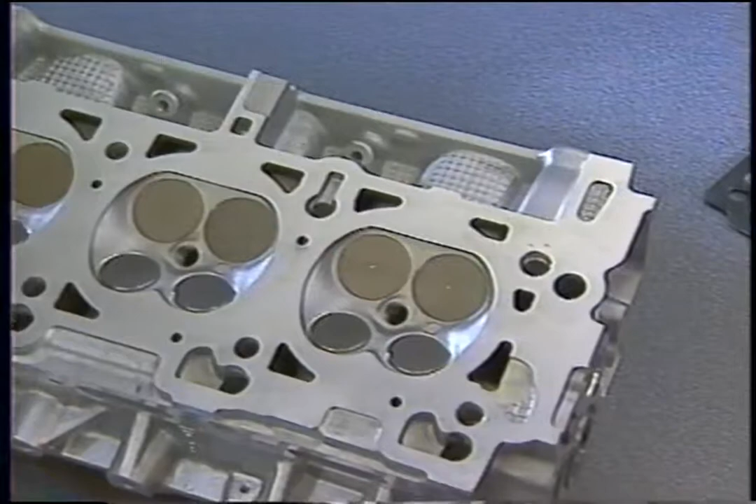Maintaining a good seal between the cylinder head and engine block has always been a critical part of engine service. With the increasing use of aluminum cylinder heads and their special sealing characteristics has come a new type of head gasket: multi-layer steel, or MLS.

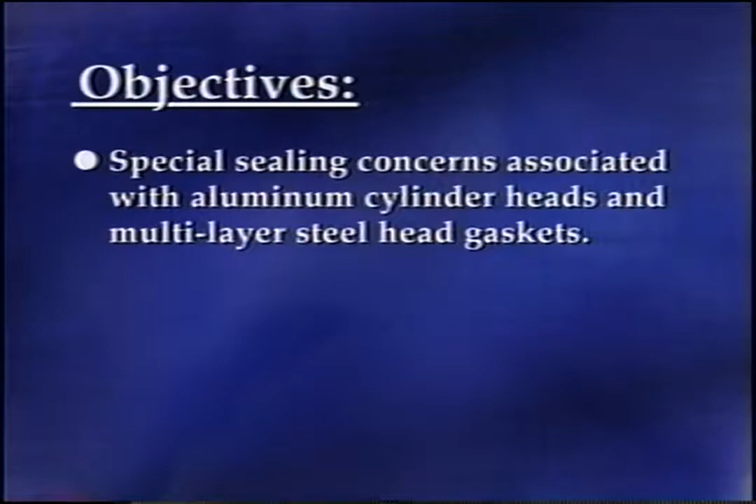aluminum cylinder heads with the new multi-layer steel gaskets. After viewing this program, you should be able to describe special sealing concerns associated with aluminum cylinder heads and multi-layer steel head gaskets, techniques you can use to check for a leak between the cylinder head and engine block, appropriate

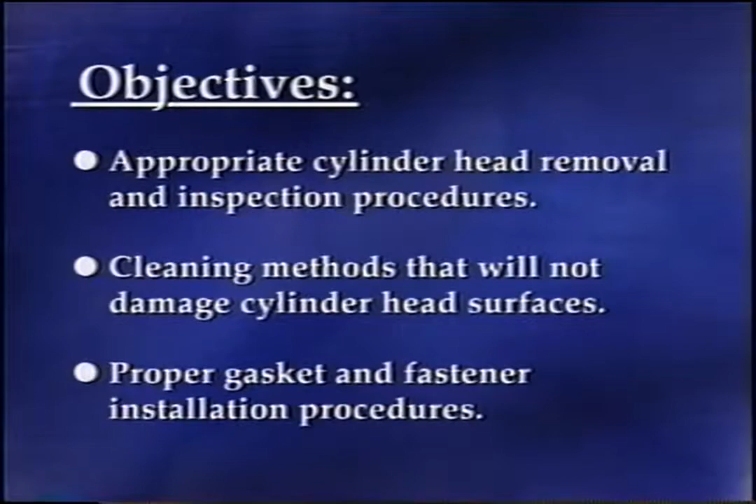cylinder head removal and inspection procedures, cleaning methods that will not damage cylinder head surfaces, proper gasket and fastener installation procedures, and proper follow-up to ensure a good repair.

In this segment, we're going to look at some of the characteristics of aluminum cylinder heads and multi-layer steel gaskets that affect sealing. Let's start with the cylinder heads.

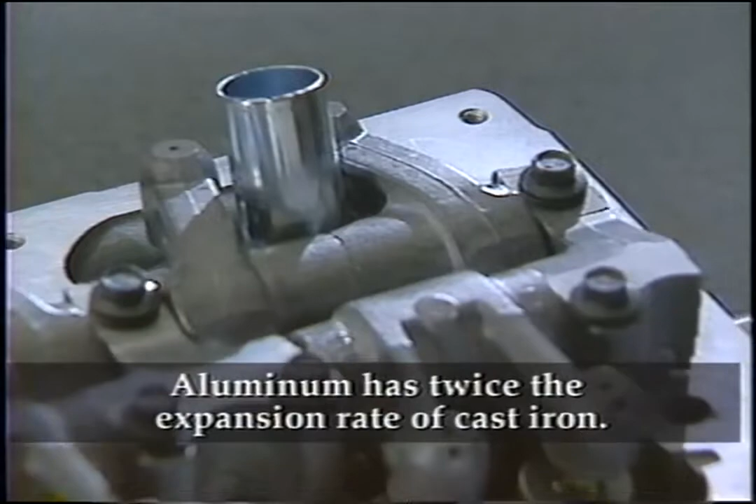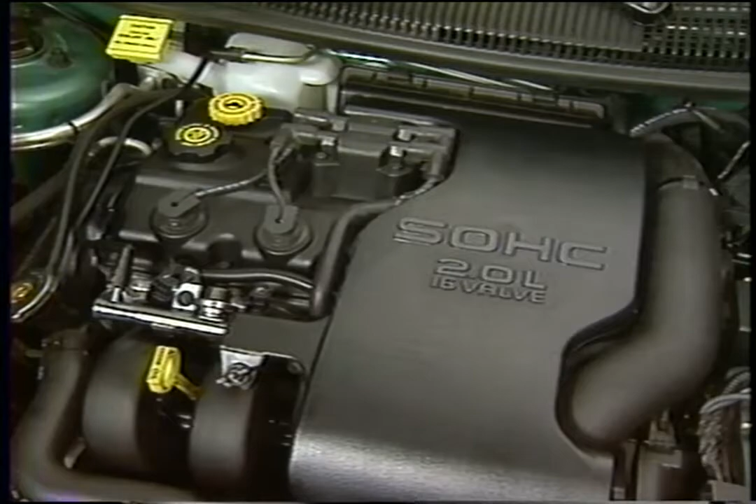First of all, cylinder heads that are made of aluminum have roughly twice the expansion rate of cast iron cylinder heads. The result is greater expansion and contraction as the engine heats and cools, and a corresponding need to maintain

a good seal with fasteners that have been tightened in the proper sequence to the correct torque. Also, aluminum's expansion rate combined with its flexibility means that overheating is more likely to result in warpage and a seal leak than with cast iron cylinder heads.

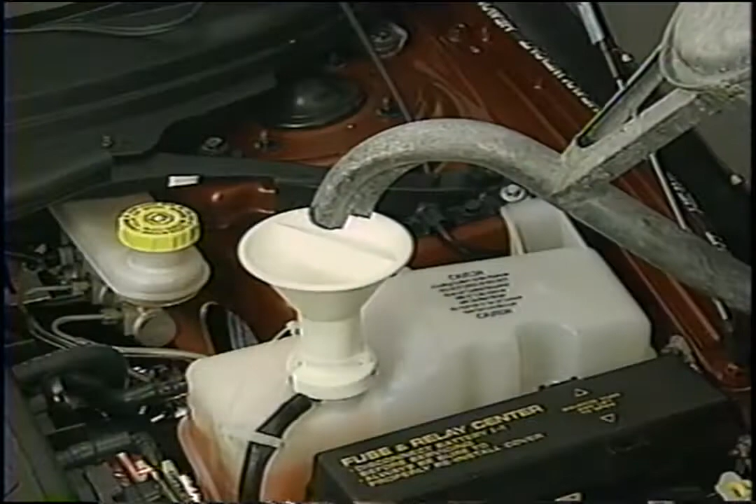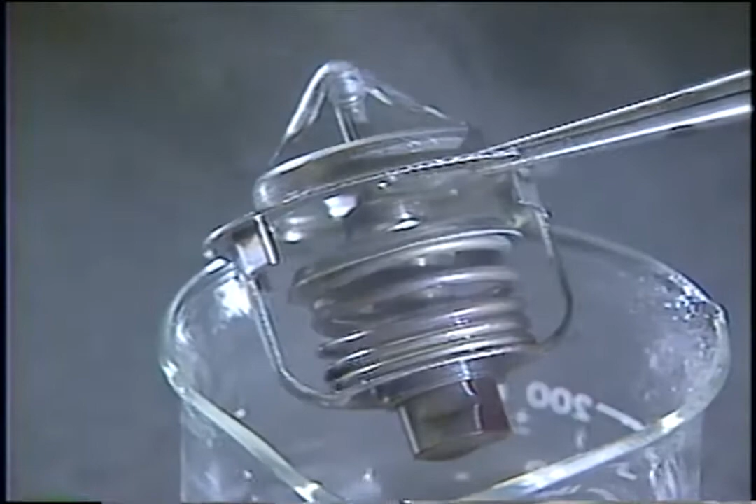As a result, it's particularly important to follow the recommended procedures when servicing the cooling system to track down and correct the causes of engine overheating and to carefully examine the cylinder head on an engine that has overheated.

The fact that aluminum is softer and more flexible than cast iron also means that incorrect removal, cleaning, and installation procedures can damage it, and that you'll need to examine it closely for cracks and corrosion.

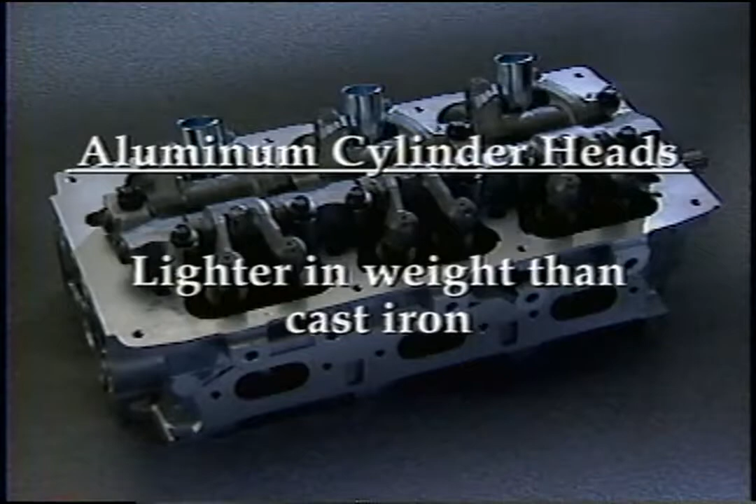Of course, on the plus side, aluminum cylinder heads are much lighter than those made of cast iron, resulting in significant weight savings. In the past, composite and graphite head gaskets have provided effective sealing for aluminum cylinder heads.

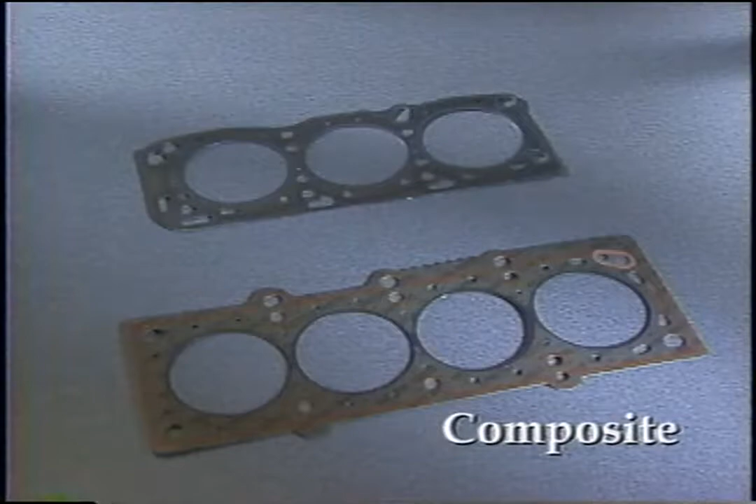Composite gaskets use a fiber facing on a steel core. Graphite gaskets also use a steel core, only with a graphite facing.

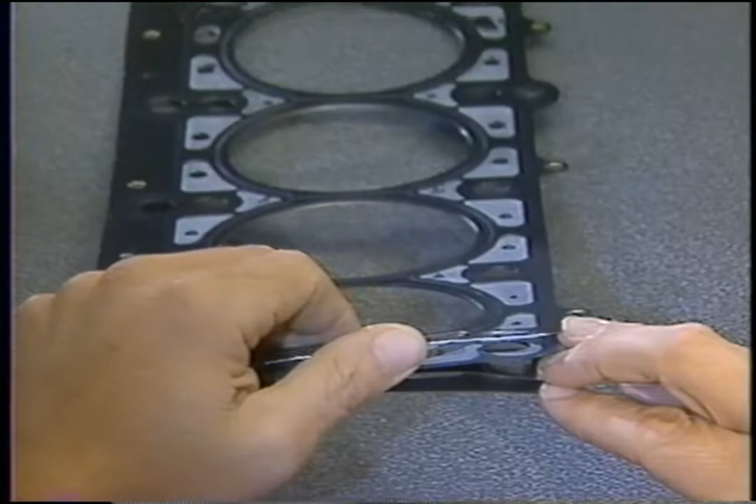Changes in gasket technology have led to the increasing use of multi-layer steel gaskets for a superior seal. As its name implies, the multi-layer steel gasket uses several layers of stainless steel. A thin rubber coating between the layers provides sealing.

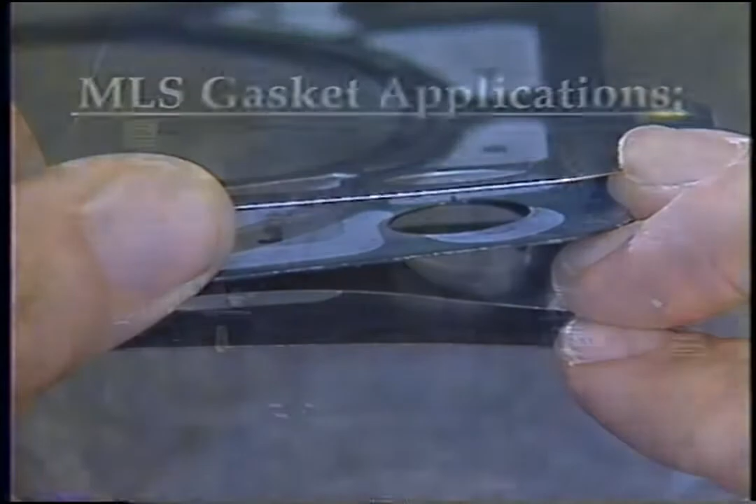Currently, multi-layer steel gaskets are used in all 2-liter and 2.4-liter four-cylinder engines with rear exhaust, and they replace the composite gaskets used for servicing these engines in previous model year vehicles.

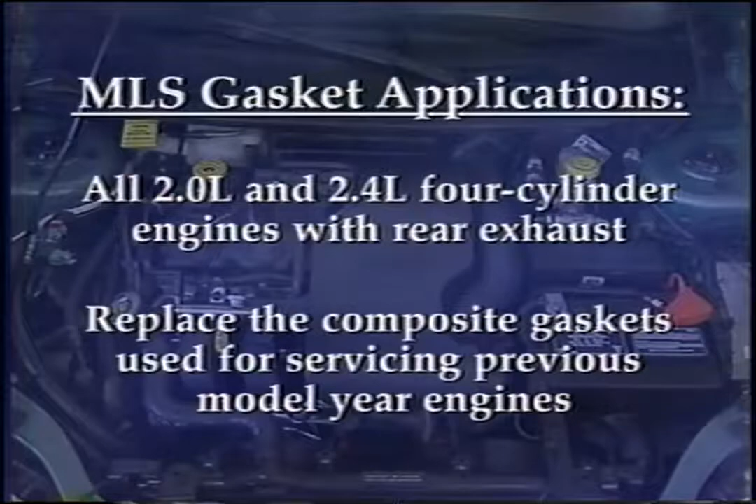You'll also find these gaskets in 2.7-liter, 3.2-liter, and 3.5-liter aluminum block V6 engines, and in the 4.7-liter V8 engine used in Grand Cherokee. The Viper V10 engine also uses this gasket design.

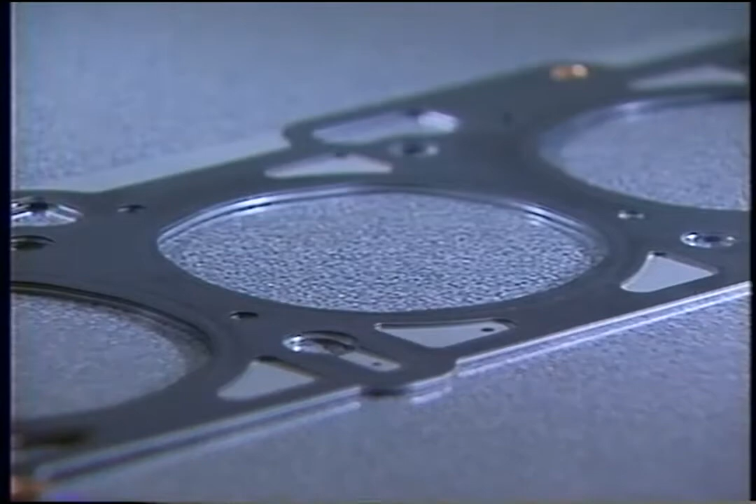The multi-layer design has a number of advantages. For one thing, because of its uniform thickness, the MLS gasket is less likely to cause bore distortion after the cylinder head is installed. The multi-layer steel gasket is also more resilient than other gaskets.

So, after being compressed, it bounces back to form a good seal. Because it provides an almost seamless transition from cylinder head to block, a multi-layer steel gasket also contributes to

lower emissions. While the multi-layer steel gasket is designed to provide a superior seal, it is not a cure-all for cylinder head or block imperfections.

And, as we'll see later, you still have to inspect these components thoroughly to ensure that they can provide a good surface for the MLS gasket to seal against.

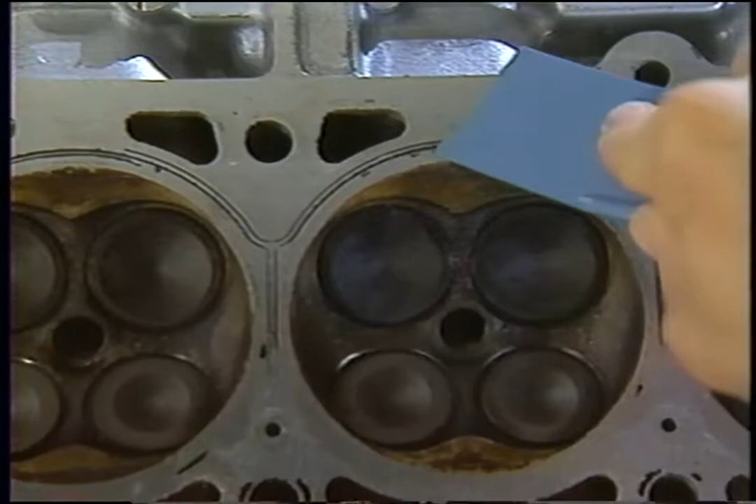When diagnosing symptoms that could be caused by a cylinder head seal leak, it's important to make sure that the cylinder head seal is in fact the cause of the symptom. Both oil and coolant can travel from external leaks in other locations to the cylinder head seal area, so it's critical to check all potential leak sources.

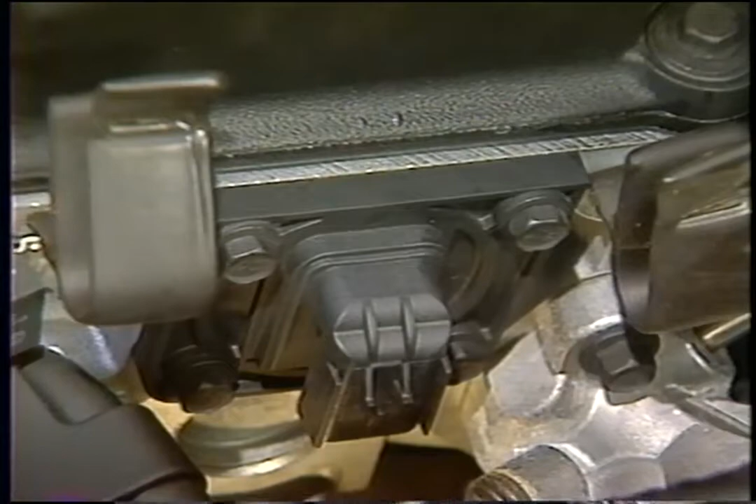In the case of oil leaks, that means checking such items as the cam sensor seal, the cylinder head cover gasket, and the PCV connections. In cases that are difficult to diagnose, you may need to use dye that is sensitive to ultraviolet light to pinpoint the source of the leak.

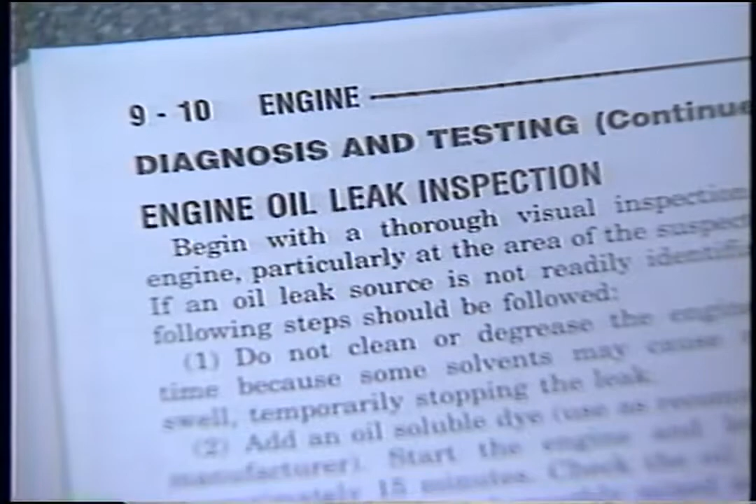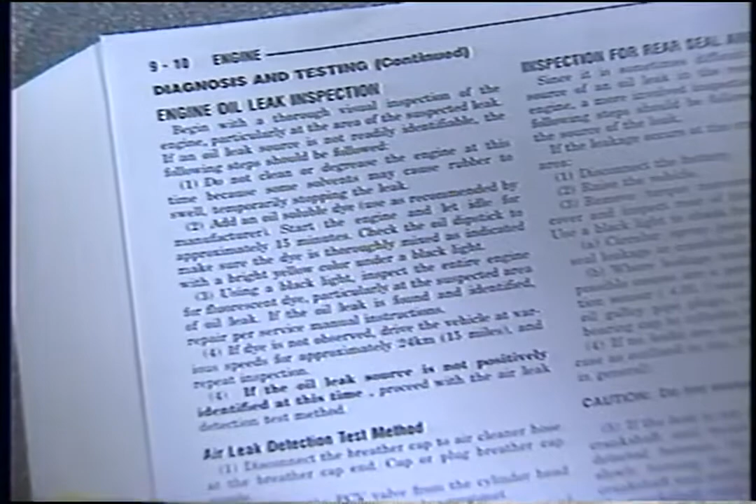Instructions for conducting this and the air leak detection test are located in Group 9 of the service manuals. They will also be covered in an upcoming Mastertech, so be sure to watch for it.

In some cases, such as when a warm engine emits large amounts of steam from the exhaust, it's pretty obvious there is an internal coolant leak, possibly from the cylinder head seal into one or more cylinders. Another obvious sign of an internal leak is spark plugs that are fouled with coolant.

When the leak is not quite so obvious, you may need to pressurize the cooling system to check its integrity. You may also need to check the coolant for oil, or use a chemical test to check for exhaust gases in the coolant. The point is to determine, based on the symptoms and the tests, exactly what, if anything, is leaking and where it is leaking to.

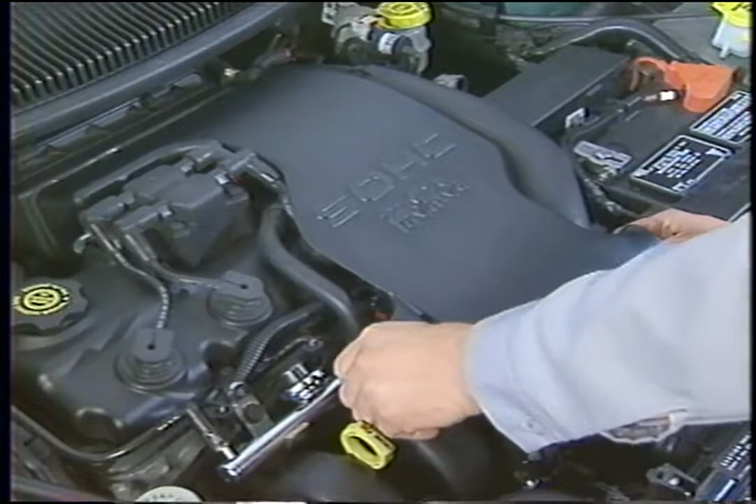Once you've established the approximate location of an internal leak, you still need to disassemble engine components and visually inspect the area to confirm the cause.

Remember, a leak between coolant and oil passages, or between these and the combustion chamber, is not necessarily proof that the cylinder head seal is at fault. In addition to the cylinder head seal, a crack in the cylinder head or in the block are also possibilities.

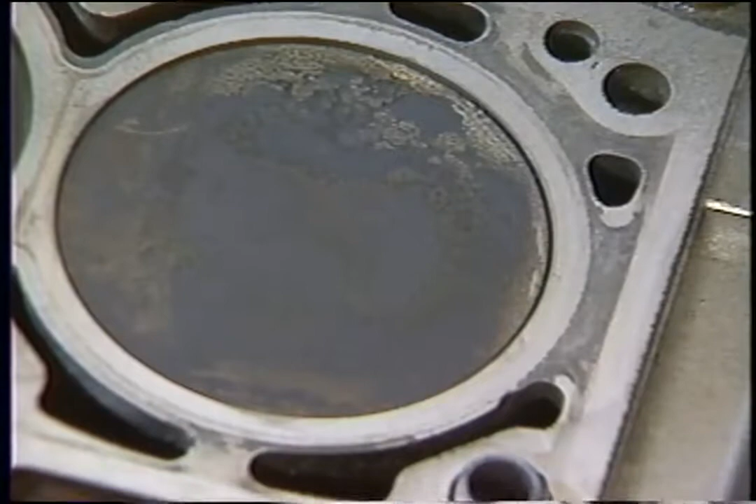Also, keep in mind that if the cylinder head seal did fail, a complete diagnosis involves finding the underlying cause of the failure. By underlying cause, we mean cooling system problems, which lead to overheating and resulting head warpage. Combustion problems, such as pre-ignition or detonation that damage the cylinder head gasket, are another underlying cause of cylinder head seal failure. Unless these problems are corrected, you're likely to see the same vehicle back again with another cylinder head sealing problem. We'll talk more about these later in the program.

It's also important to use appropriate cylinder head removal and cleaning procedures to avoid creating new sealing problems. These procedures are the subjects of the next part of this program.

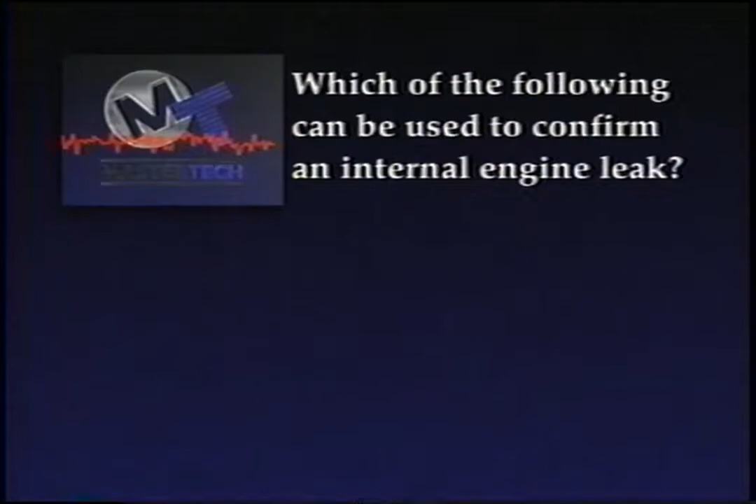Which of the following can be used to confirm an internal engine leak? A, an inspection of the spark plugs. B, a cooling system pressure test. C, a chemical test for exhaust gas in the coolant. Or D, all of the above.

The correct answer is D. All of these methods can be used to confirm an internal engine leak.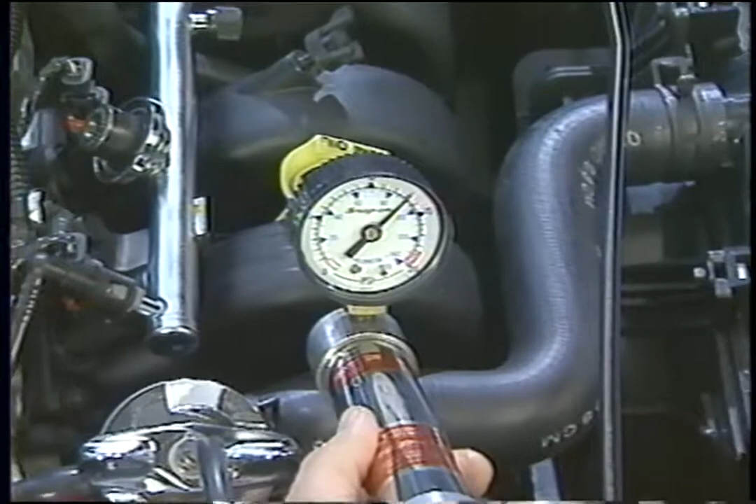Once you've reached the conclusion that a failure of the cylinder head to seal against the block is a probable or possible cause of the symptoms, you'll need to disassemble and clean engine components so you can inspect them. At this point, it's important not to create any new sealing problems by careless removal and cleaning procedures.

Care in cylinder head removal starts with unbolting the head using the reverse of the tightening sequence. The general pattern is from the outside in. Loosening the fasteners in this manner reduces the chance of aggravating any warpage that may already be present.

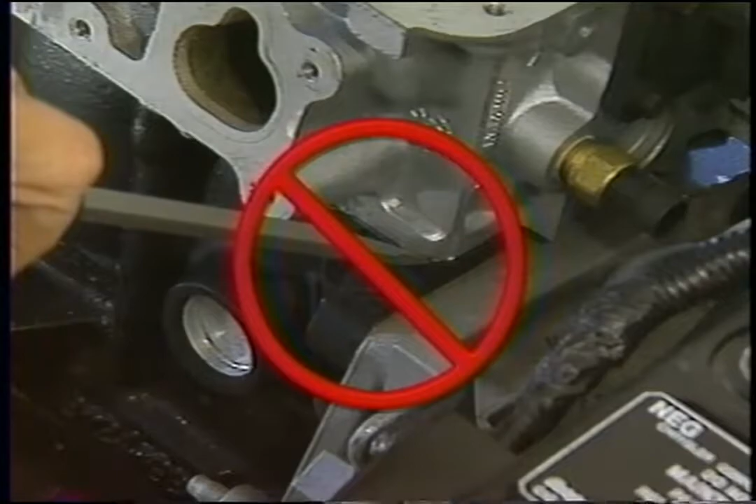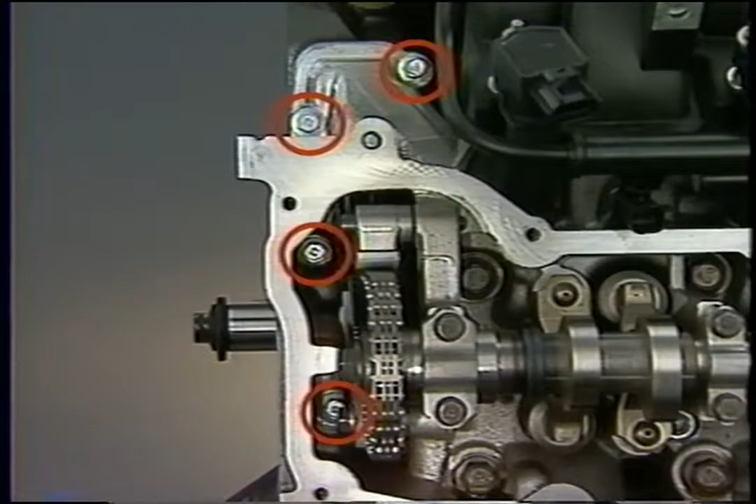When cylinder heads are stuck to the block, take care not to damage the sealing surfaces by prying on them. And keep in mind that some cylinder heads, such as those on the 4.7-liter engine, use smaller fasteners in areas that may not be obvious. In other words, make sure that all the bolts have been removed.

Once you have removed a cylinder head from the vehicle, try to avoid placing it on its sealing surface, and don't slide the sealing surface over a bench top. Doing so can easily damage an aluminum cylinder head, particularly when the bench top is metal.

In cases where a head does have baked-on gasket material or deposits, you'll need to use cleaning procedures that will not damage the sealing surfaces.

Under no circumstances should you use metal tools on aluminum cylinder heads. Such tools will damage the aluminum and prevent the cylinder head from sealing.

A recent technical service bulletin details the accepted cleaning procedures for aluminum cylinder heads.

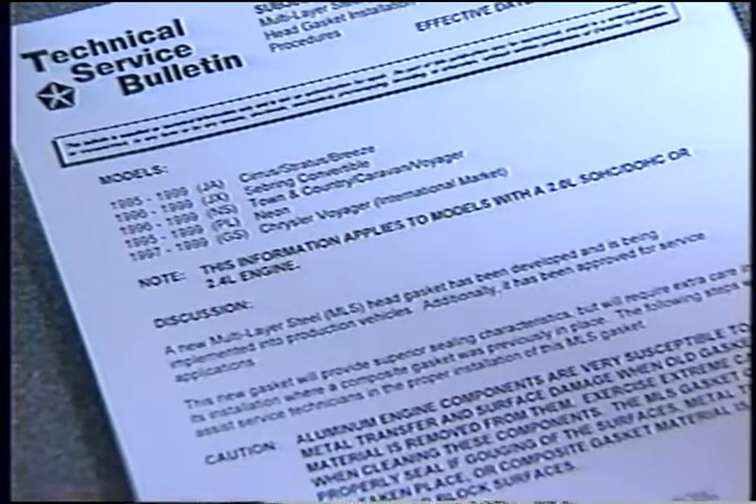TSB 9598 is aimed at recommended procedures for installing a multi-layer steel gasket on 2-liter single overhead cam engines and 2-liter and 2.4-liter dual overhead cam engines. However, the cleaning procedure applies to any aluminum cylinder head.

Begin by removing as much of the gasket material or deposits as you can with a plastic scraper.

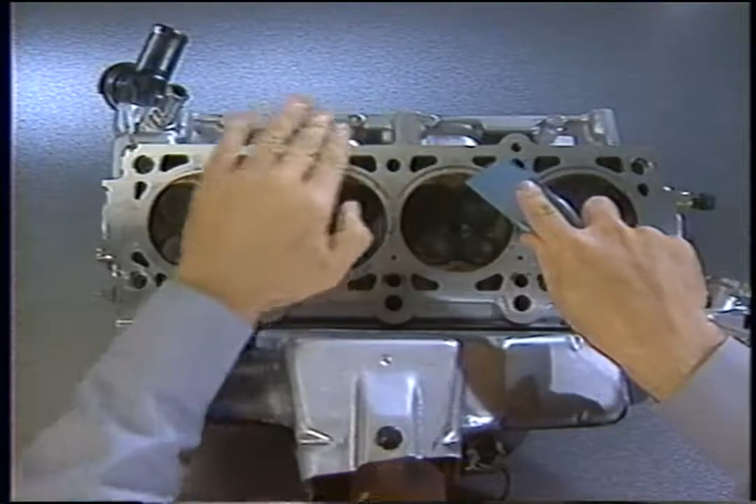As you perform the following cleaning procedures, periodically inspect the head for damage that could prevent it from sealing when reinstalled. There's no point in continuing to clean a cylinder head that is too heavily damaged to seal properly anyway.

Also, if the symptom was a coolant leak into a combustion chamber and the cylinder head gasket looks intact, you may want to send out the cylinder head at this point for pressure testing, because the cause may be a crack in the cylinder head.

In some cases, you may need to use a gasket remover solvent along with a scraper to clean the head.

In many cases, especially when the previous gasket was a multi-layer steel design, you may be able to clean the sealing surface using the methods we have discussed so far. In other cases, you'll need to use more aggressive techniques.

To remove any remaining material on the cylinder head sealing surface, you can use a white plastic 3M Roloc bristle disc.

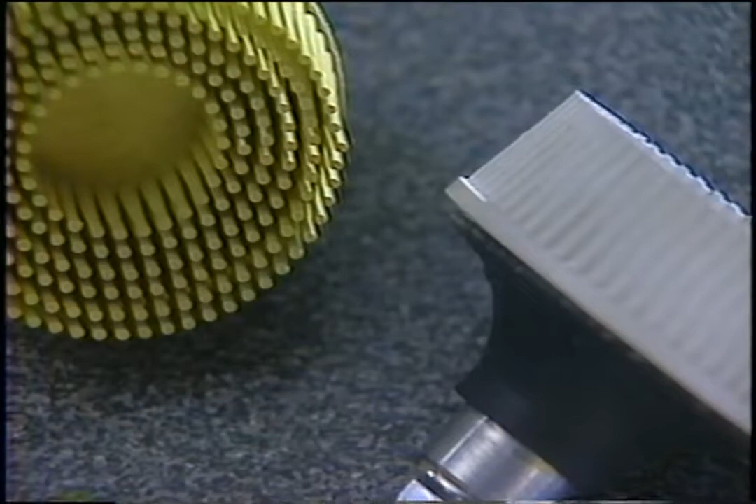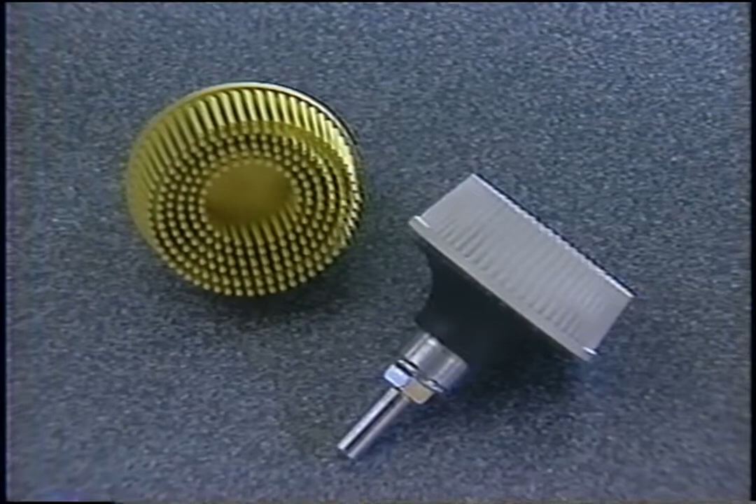Note that this is a particular type of 3M disc that uses plastic bristles, and it should not be confused with 3M abrasive discs that could damage the cylinder head.

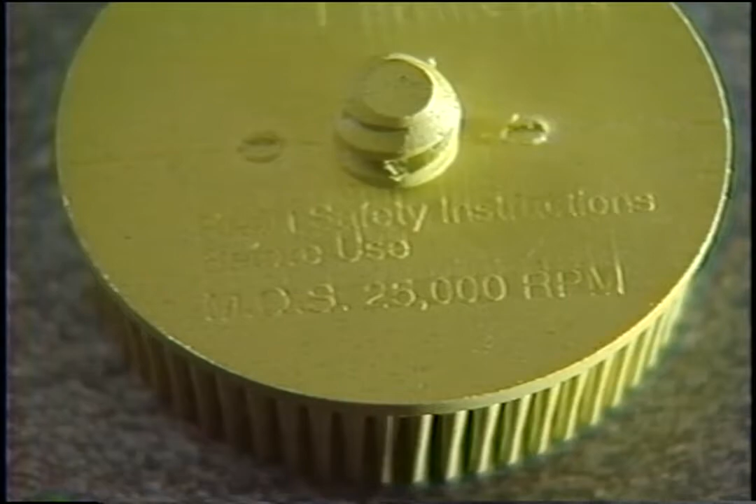To obtain the best results, you need to use the bristle disc at close to the maximum operating rotation speed. You may need to use a die grinder or moto tool to obtain these speeds.

Also, when using the bristle disc, do not allow it to contact the sealing surface for any longer than necessary, or you could, for example, round out the edges of coolant passages and undermine sealing.

In extreme cases, you can use a yellow 3M Roloc bristle disc to remove any remaining material. Keep in mind, however, that you'll need to take even greater care when using this disc, or you will damage the cylinder head.

You can use the same methods to clean other engine components, such as the sealing surfaces of the block and manifolds. However, if the component is aluminum, you'll have to use the same care as with aluminum cylinder heads.

As part of the block cleaning procedure, you should always use compressed air to blow any foreign material out of the bolt holes. Then check the holes for any remaining foreign material, corrosion, and damage.

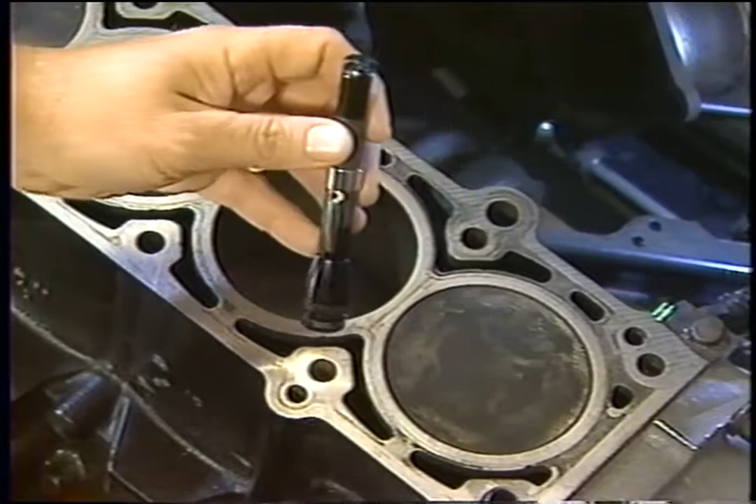If the bolt holes are partially filled with foreign material, you can damage the block when installing a bolt. If the threads are corroded or damaged, it may not be possible to obtain the proper torque on the cylinder head bolts.

Once you've cleaned the cylinder head and other engine components, you can inspect them for damage or wear. That's the subject of the next part of this program.

Before we move on, however, try this review question. Which of the following can be used to clean the sealing surface of an aluminum cylinder head? A, metal scraper; B, wire brush; C, plastic scraper and gasket remover solvent; or D, sandpaper?

The correct answer is C. You can use a plastic scraper with or without gasket remover solvent, and you can carefully clean these heads with a white Roloc bristle disc, but you should never use metal scrapers or any other tools which could damage the surface of an aluminum cylinder head.

Thoroughly inspecting cylinder head components to see if they need to be replaced or brought back into specification is a critical part of cylinder head gasket service. If a part is outside of specifications or damaged in some way, you simply can't count on it providing a good seal.

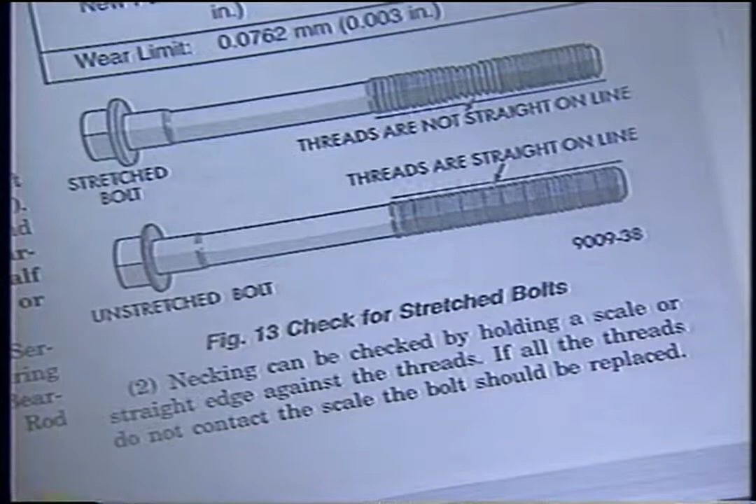Let's begin with cylinder head bolts, which are reusable, but only if you've inspected them using the procedure in the applicable service manual. You can check the head bolts for stretch with a straight edge.

If the threads are not aligned with the edge, the bolt has stretched and must be replaced. Corrosion and thread damage are additional reasons to replace head bolts.

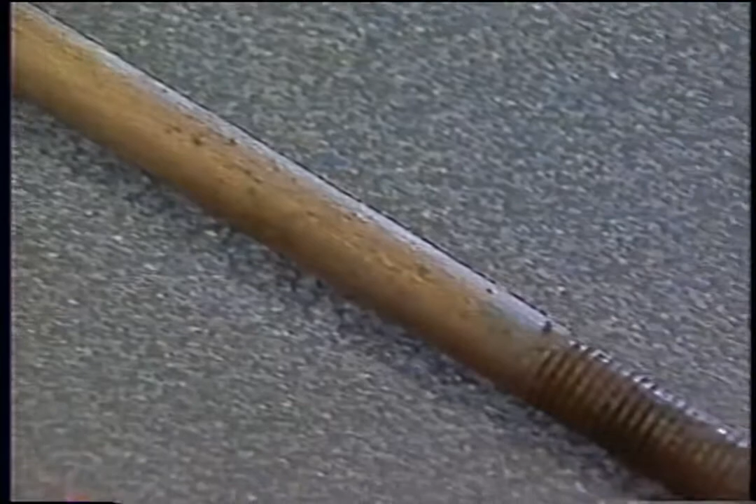You'll also need a straight edge along with feeler gauges to check the cylinder head sealing surfaces for flatness. In general, the check involves positioning the straight edge parallel to, at right angles, and diagonally to the length of the cylinder head.

Pay particular attention to the areas between the bores, since warpage in these areas is likely to result in a failure to seal.

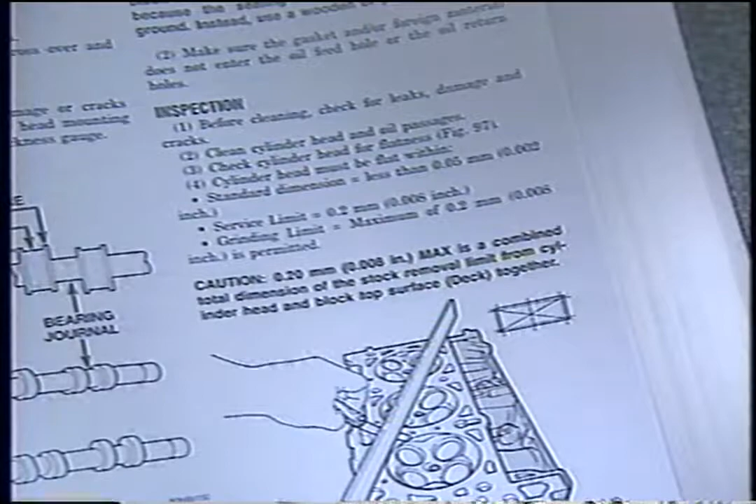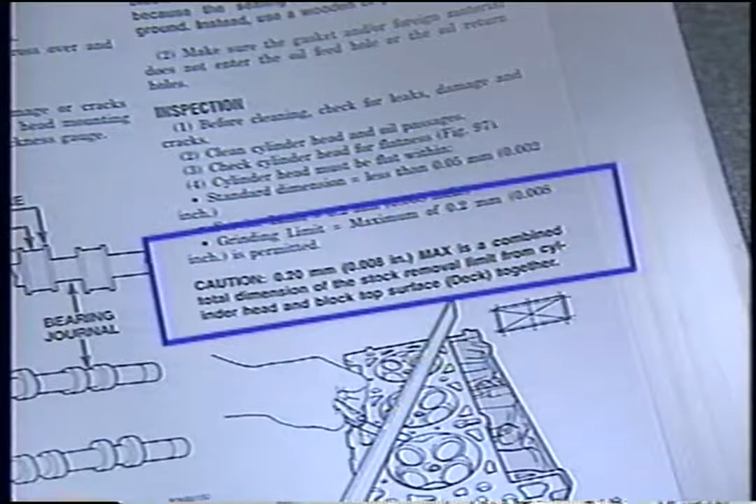The service manuals contain specifications for cylinder head flatness, so be sure to consult the one for the engine you're working on. You can use the same method to check the block deck for flatness. In some cases, if the warpage is relatively minor, you can consult your local machine shop or cylinder head reconditioner to bring it within specs. Keep in mind, however, that machining affects a number of other components, such as the valve train and manifolds, so be sure to follow the recommendations in the appropriate service manual concerning machining cylinder heads and blocks.

Besides warpage, there are other problems that can affect sealing, such as corrosion, pitting, and gouges on the sealing surfaces. Pay particular attention to the areas between combustion chambers and around coolant passages, since these are most likely to leak if there is severe surface damage. And don't overlook the corresponding areas on the engine, particularly if it has an aluminum block. Cracks are another problem you'll need to inspect the cylinder head and block for. Pay particular attention to the areas around valve seats.

Once you're sure you have a cylinder head and block that will seal properly with the new gasket, you are ready to reassemble the engine components. Before we move on to that part of our program, try this review question to check your knowledge of inspection methods. Technician A says that cylinder head bolts are not reusable. Technician B says that you need to measure each bolt's diameter with the dial caliper before reusing it. Who is correct? A, A only; B, B only; C, both A and B; or D, neither A nor B?

The correct answer is D. You can reuse cylinder head bolts provided you check them for stretch by placing a straight edge against the threads and looking for gaps.

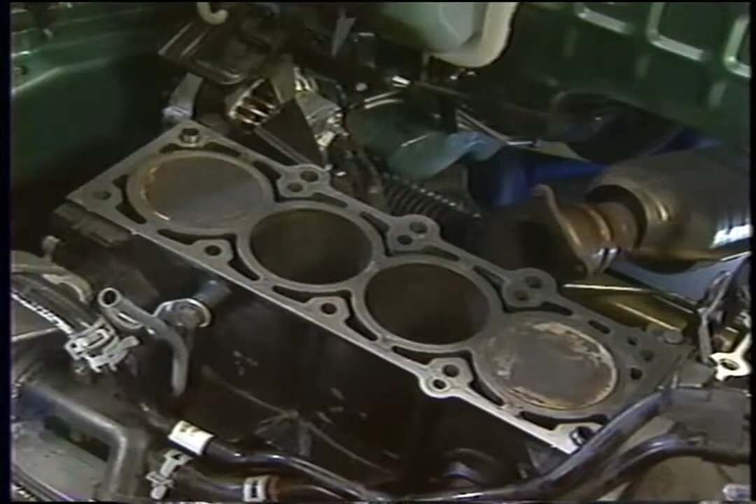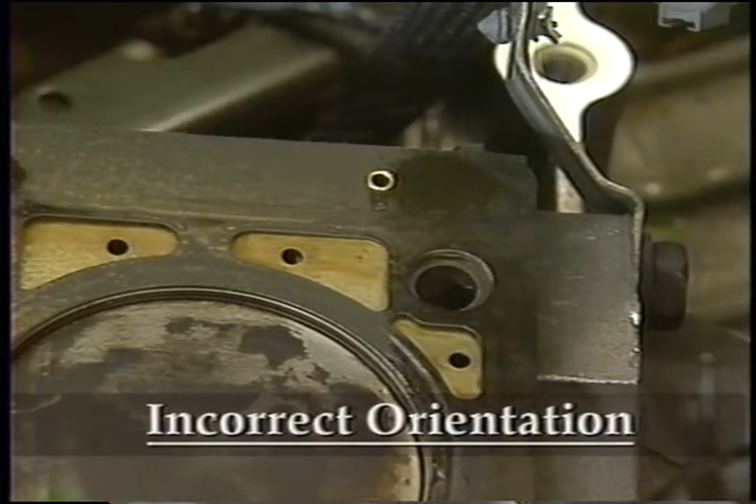The next thing to be aware of when installing a new gasket is that it's possible to install some gaskets incorrectly. Make sure the part number on the gasket is facing up and the oil holes aligned. Installing a gasket incorrectly can route oil to the wrong passages and cause severe damage to the engine. And on gaskets for V-type engines, be aware that some applications use right and left gaskets that should not be switched.

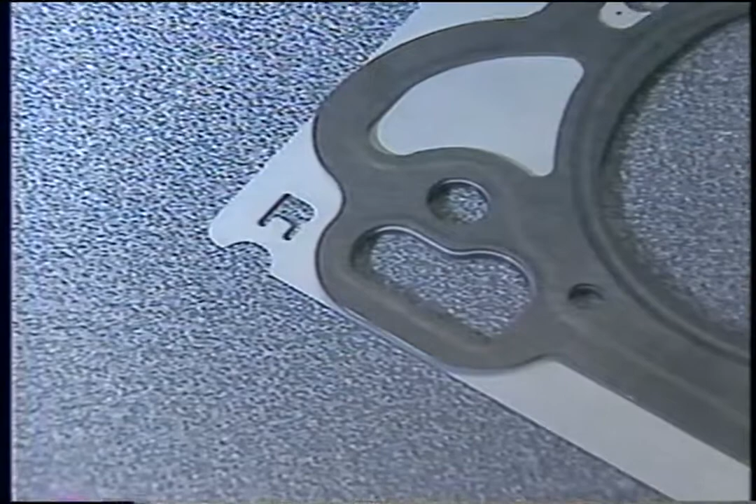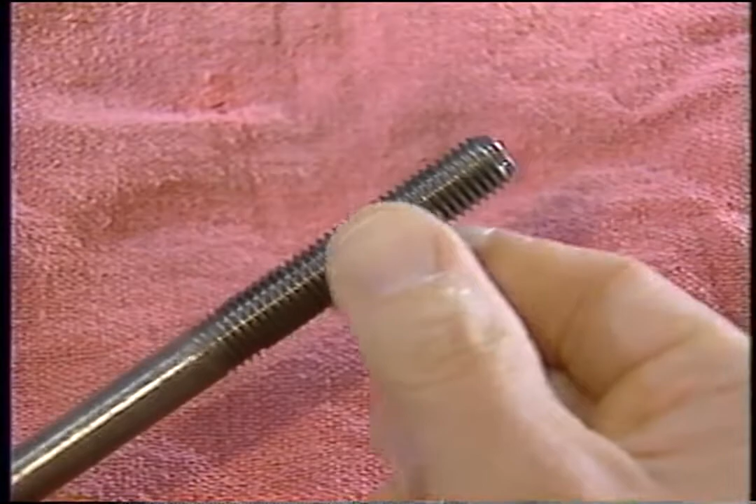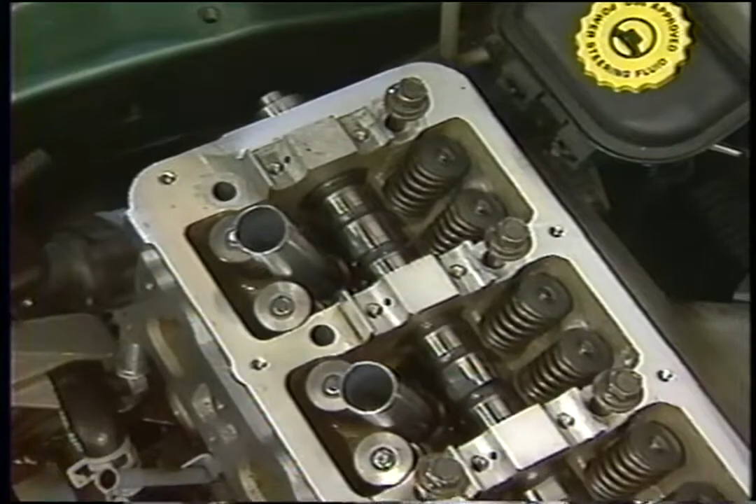Earlier we described how to inspect cylinder head bolts to make sure they are reusable. Once you've replaced those that are not, lightly oil the bolt threads prior to installation. Do not squirt oil into the bolt holes. Bolts that have a Dacromet coating, such as those used on Viper, and bolts that you need to apply thread sealer to should not be oiled. When placing the head bolts in their proper positions, keep in mind that some bolts may be shorter than others. For example, on 2-liter single and dual overhead cam engines, the bolts at the corner locations are shorter.

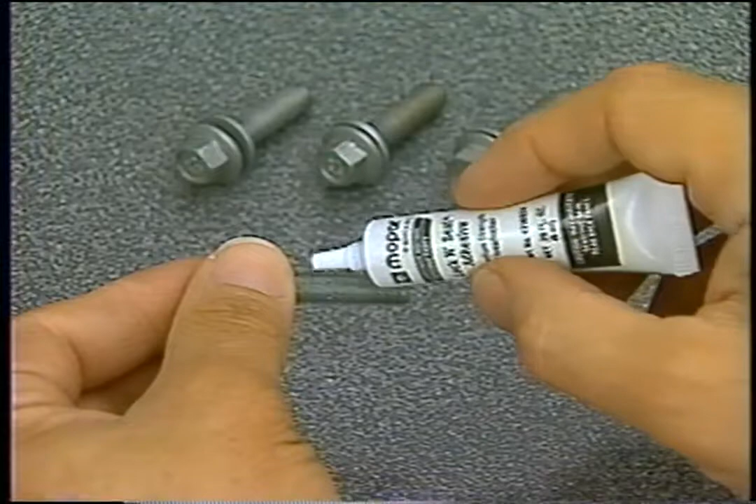On some engines, some of the cylinder head attaching bolts are smaller and in locations that may not be readily apparent. On the 4.7-liter engine, there are 4 smaller bolts at the front of each cylinder head. These bolts are also special because instead of being lightly oiled, they must be coated with thread sealant prior to installation. On the 2.7-liter engine, there are 3 smaller bolts at the front of each cylinder head.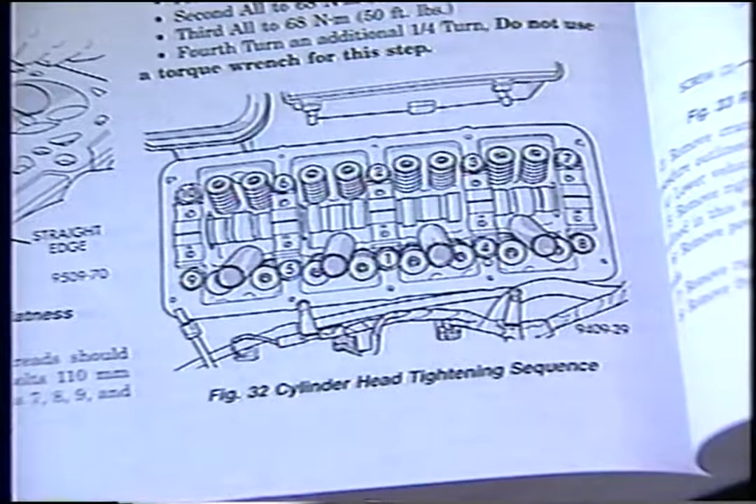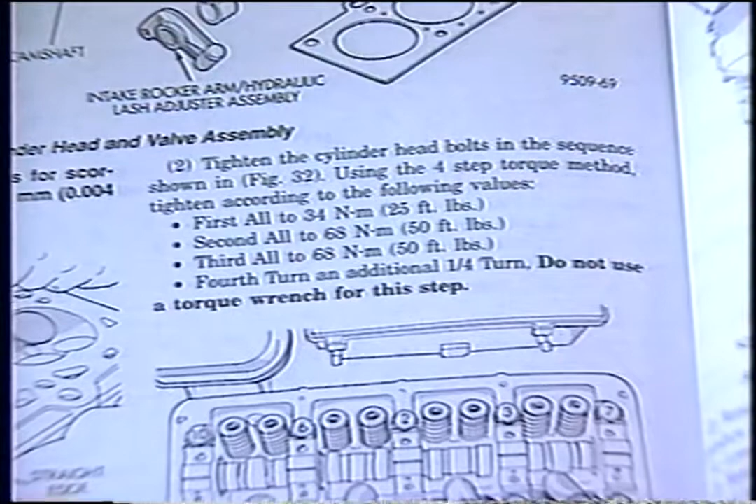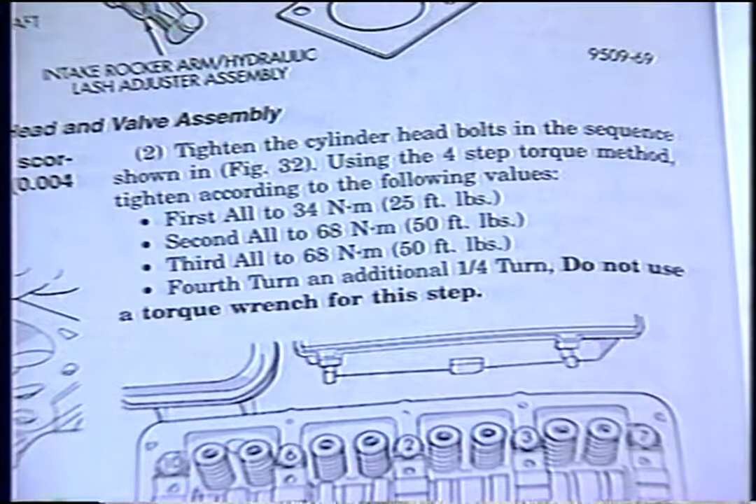On all engines, tightening the cylinder head bolts must occur in a numbered sequence, a sequence that generally works outward in both directions from a starting point in the middle and that requires multiple steps to achieve the final torque. On the engines we've been discussing, there is an additional step that involves tightening the bolt an additional 90 degrees. This method of tightening the bolts is referred to as the torque angle method. Let's look at this sequence on Neon with a single overhead cam engine.

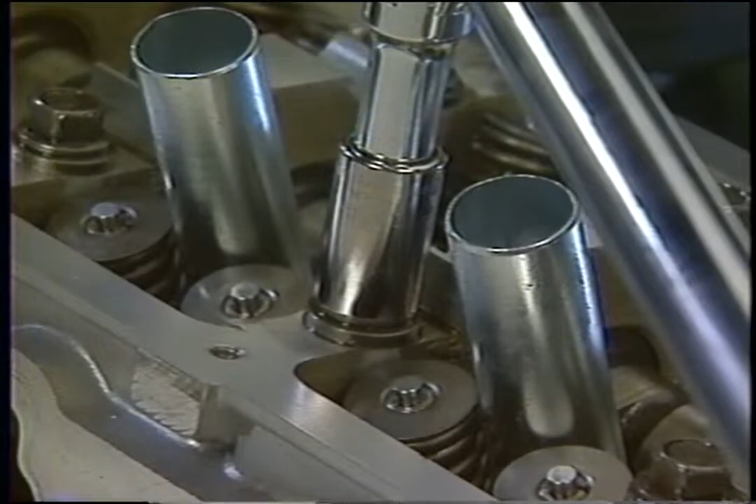The first step is to tighten all the bolts to 25 foot-pounds using the sequence specified in the service manual. Then, tighten the bolts in sequence to 50 foot-pounds. The third step is to go over all the bolts in sequence again with the torque wrench set at 50 foot-pounds. The final step is to turn each bolt an additional 90 degrees using the same sequence. Notice that we do not use a torque wrench for this final step. That's because a torque wrench handle can move without actually turning the bolt. Be sure to consult the appropriate service manual and relevant TSBs for cylinder head bolt installation procedures and specifications.

While we're on the subject of torque, you need to be aware of a change in specifications for dual overhead cam 2-liter engines being fitted with a multi-layer steel head gasket. This change is spelled out in the TSB we've been referring to, 9598. As before, the corner bolts are tightened to 20 foot-pounds during the first step. On the second and third steps, however, the bolts are tightened to 35 foot-pounds. The rest of the tightening procedure remains the same.

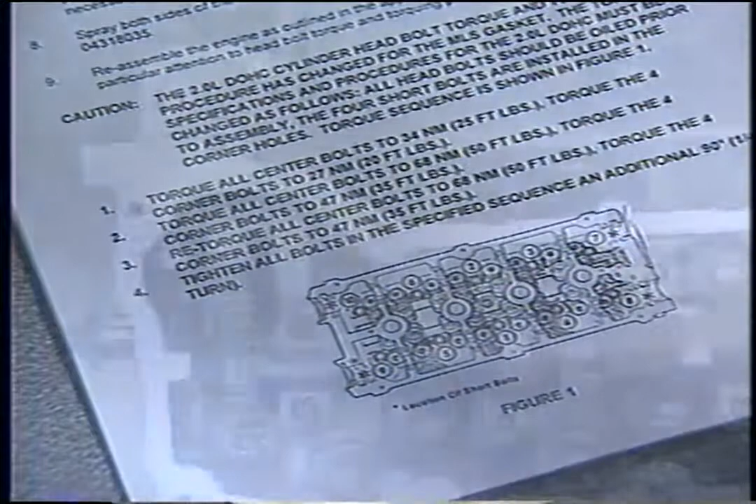Oh, and by the way, the smaller bolts at the front end of the cylinder heads we've been talking about do not use the torque angle method for tightening. See the appropriate service manual for the correct torque specifications for these bolts.

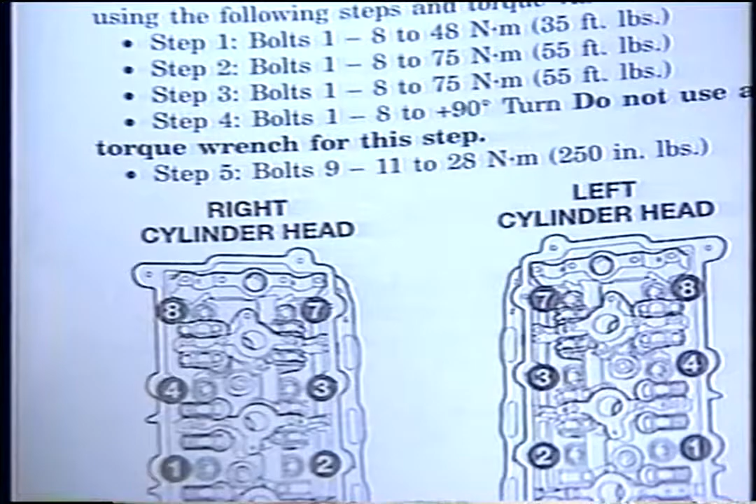Next, we're going to look at some follow-up procedures that help ensure the new gasket can do its job. First, though, try this review question. It's a good idea to stop the tape to discuss the question and answers as well as the material in this segment before moving on to the next segment. Which of the following statements about cylinder head installation are true? A. Never use spray sealant on the gaskets. B. Oil all cylinder head bolts. C. Tighten all bolts an additional 90 degrees as a final step. Or D. None of the above.

The correct answer is D. None of the above. Some gaskets do use spray sealants. Not all cylinder head bolts are oiled, and not all cylinder head bolts are tightened an additional 90 degrees.

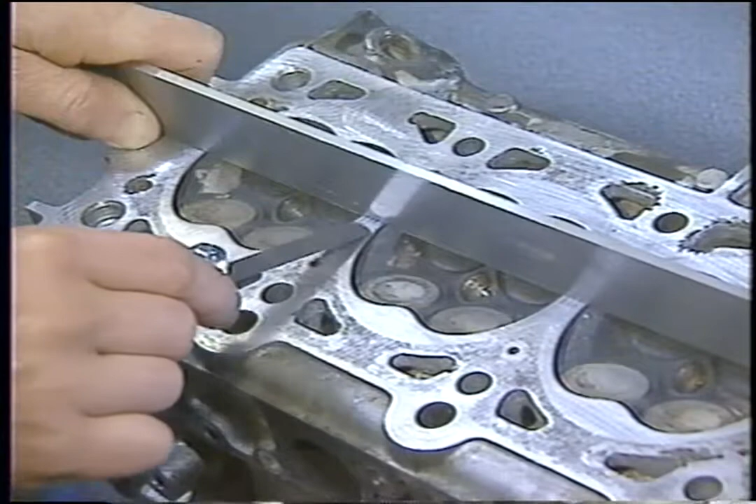It doesn't do much good to replace a cylinder head gasket if the conditions that caused it to fail are still present. If engine overheating caused the cylinder head or block to warp, you're going to have to discover the cause. Of course, you'll want to start with the cooling system by checking for anything that is preventing the system from doing its job. Is the system leaking? Are the cooling fans doing their job? Is the thermostat faulty? Is the water pump circulating coolant? Is there a blockage in the radiator or coolant passages?

Besides warpage, overheating can also cause detonation and pre-ignition that can damage the cylinder head gasket. Besides overheating, there are a number of other areas you'll need to examine if detonation or pre-ignition caused the cylinder head seal to fail. Was the owner using low-octane fuel? Is the knock sensor working? Is the EGR operating? Are there carbon deposits on the pistons? Is something leaning out the fuel mixture?

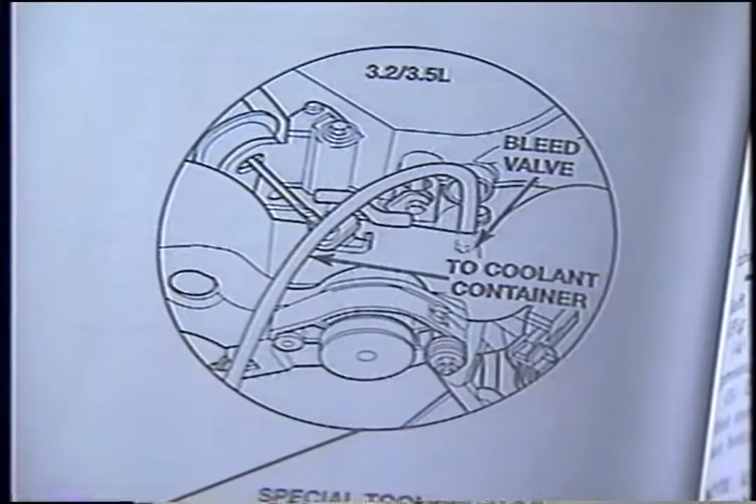One condition that can cause a cylinder head gasket to fail is also one that you'll need to be aware of when you refill the cooling system. I'm talking about air pockets that can cause localized or general overheating. To avoid these air pockets, you should always follow the recommendations in the appropriate service manual for cooling system refilling. Some of the procedures specify the use of special tools and bleeding devices to avoid trapping air in the system.

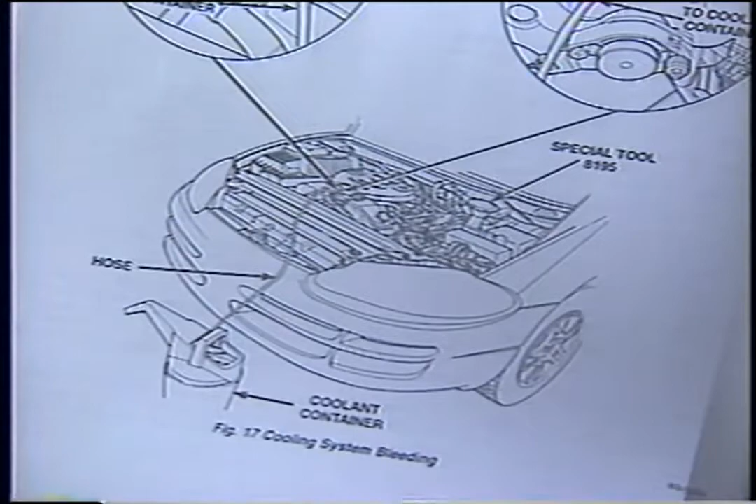For example, when refilling the cooling systems on vehicles equipped with 2.7, 3.2, and 3.5 liter V6 engines, you'll need to install a special funnel fill tool on the coolant bottle. Refilling these and other systems may also involve the use of bleeder screws or plugs that help prevent air pockets.

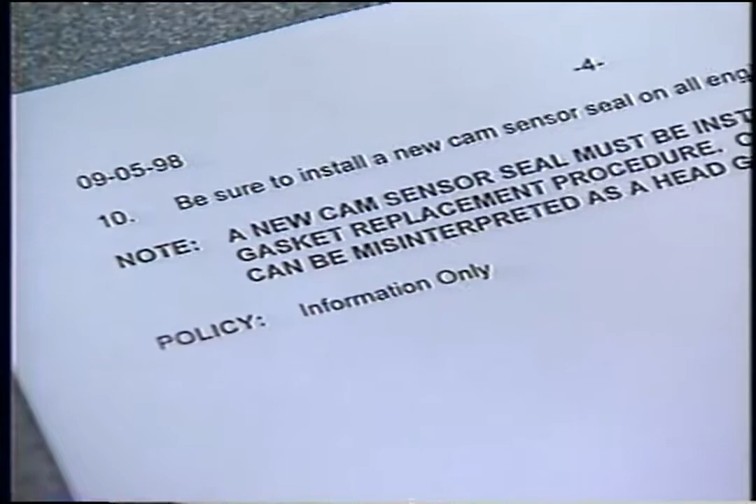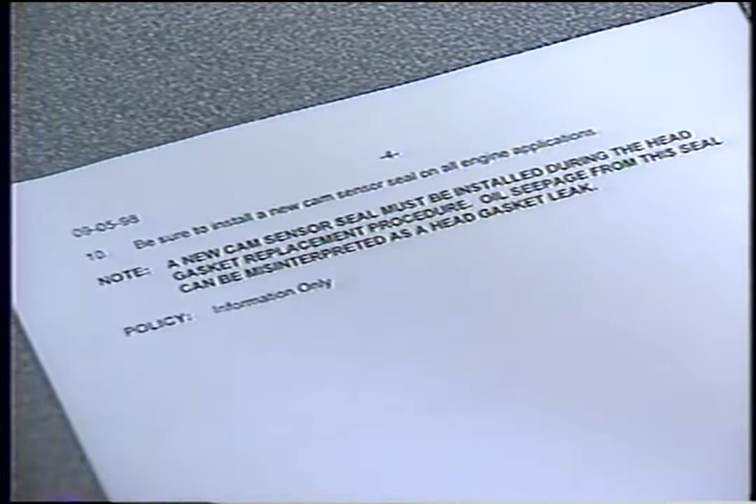The technical service bulletin we have highlighted in this program also specifies an additional step to help ensure a successful repair, and that is replacing the cam sensor seal. Using the old seal is an invitation to a leak, one that could be difficult to distinguish from a cylinder head gasket leak.

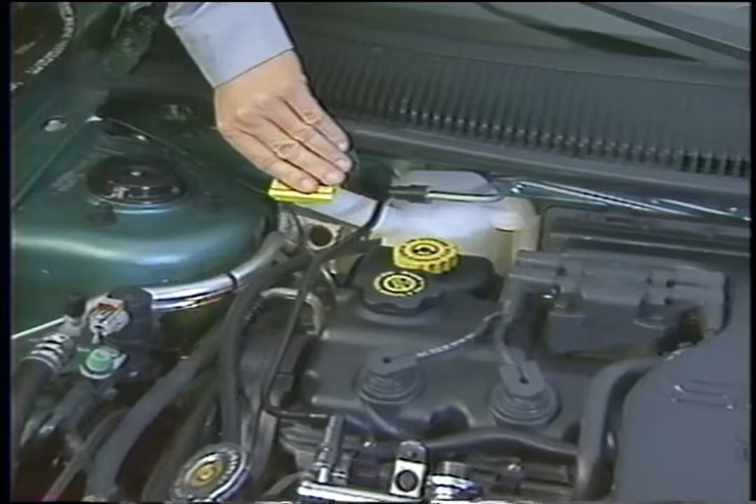When you've finally gotten the engine back together again, a final step is to verify the repair by running the engine and keeping an eye out for evidence of leaks, both external and internal. You may need to test drive the vehicle before you can be sure that the leak has in fact been fixed. The coolant level may drop as any trapped air works its way out of the cooling system. If this happens, be sure to top off the cooling system and run the engine again to check for drops in coolant level that may indicate a leak.

Now that we've covered follow-up and verification, try this final review question. Technician A says engine overheating can cause warpage that can cause the cylinder head gasket to leak. Technician B says that overheating can cause pre-ignition that can cause the cylinder head gasket to fail. Who is right? A, A only; B, B only; C, both A and B; or D, neither A nor B?

The correct answer is C, both A and B. Engine overheating can cause not only head warpage but pre-ignition, which can damage the cylinder head gasket.